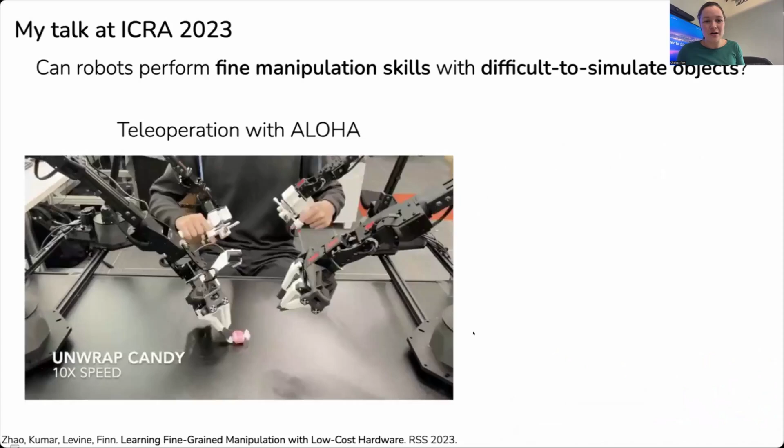I want to start off by going back to my talk at ICRA last year. I talked a lot about how robots can perform fine manipulation skills with difficult to simulate objects, including deformable objects. Specifically, I presented some of our work on the ALOHA teleoperation system.

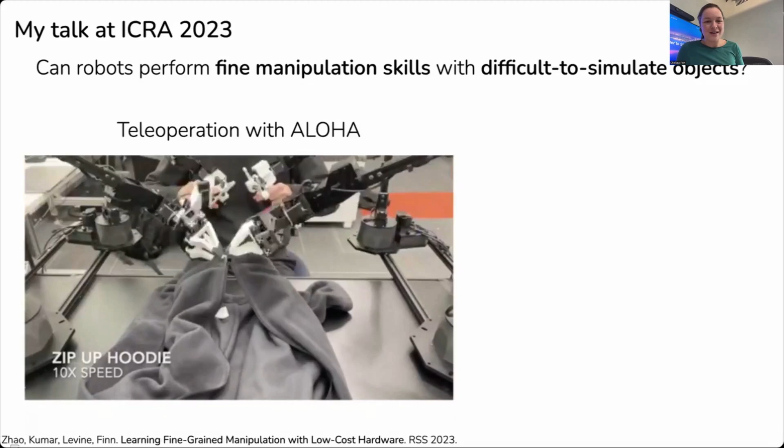A big part of this work was first on the hardware side, trying to develop a teleoperation system that allows you to perform a wide range of different tasks, including tasks like being able to stuff things into a plastic bag, zip up a hoodie, and so forth.

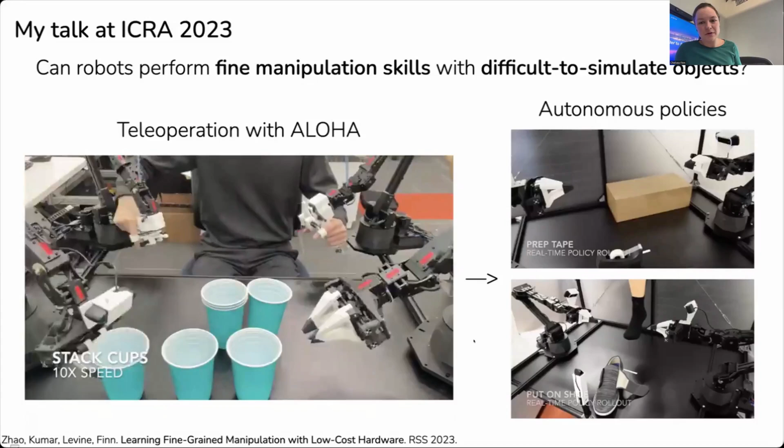With the system, we were able to train neural network policies to autonomously complete different tasks by providing 50 demonstrations of each task and training a neural network to control the robot to do that task.

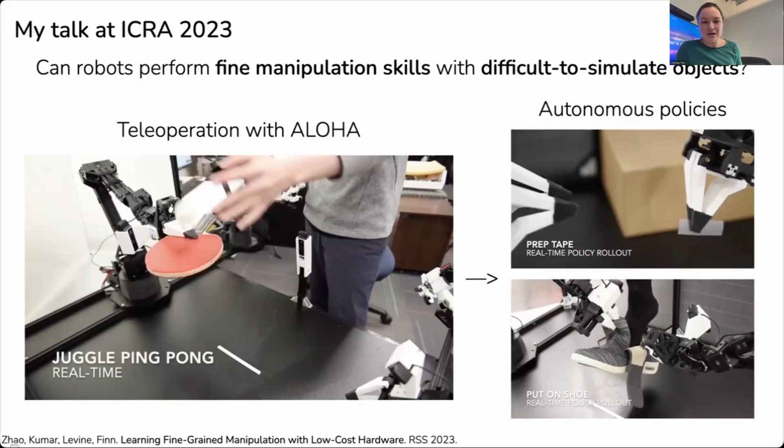On the top right was a task of tearing off a piece of tape and putting it on a box. And on the bottom right, we were learning a task of putting a shoe on a foot.

What I want to talk about today is building quite a bit on this question of, can we enable robots to perform fine manipulation skills with difficult to simulate objects? But I'd like to take it one step further and see whether we can learn fine mobile manipulation skills, and moreover, learn long horizon fine manipulation skills. In both cases, we'll be looking at really difficult to simulate objects.

So let's dive in and talk about fine mobile manipulation skills. When we started this work, we wanted to learn mobile manipulation skills, and we actually did a project.

Zipeng was working on a project with a LoCoBot. We were trying to learn mobile manipulation. He was really interested in the kind of whole body control. And this was a platform that we already had in the lab.

It turned out that when we actually went to collect data on this platform to try to learn manipulation tasks, it was extremely time consuming to try to control a robot. We started out with like a joystick or a handheld controller or a keyboard controller and so forth.

And we weren't able to figure out a good way to efficiently collect data on this platform. So Zipeng, after this, was really motivated to try to understand if we can efficiently collect mobile manipulation data that would allow us to learn from that data.

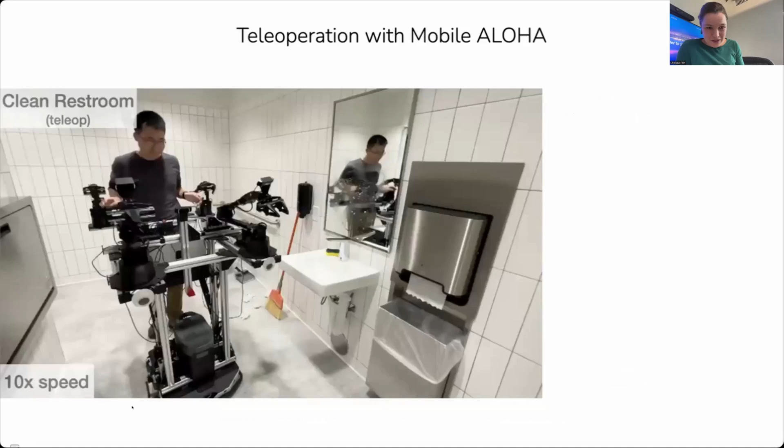Specifically inspired in part by the ALOHA work, he decided that he wanted to work on mobile bimanual manipulation. The resulting system that he developed, focusing on teleoperation, is this system right here. It's a mobile bimanual manipulation system.

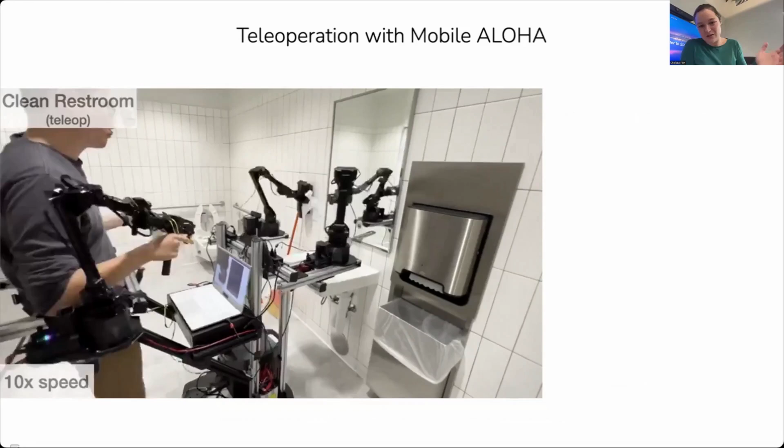You can see him teleoperating the robot to do a fairly wide range of tasks here, but basically all surrounding cleaning the bathroom. Unlike the previous system, he's able to do a wide range of tasks, and he's able to do so fairly efficiently. This is sped up so that we can show you a wide range of things that you can do with it.

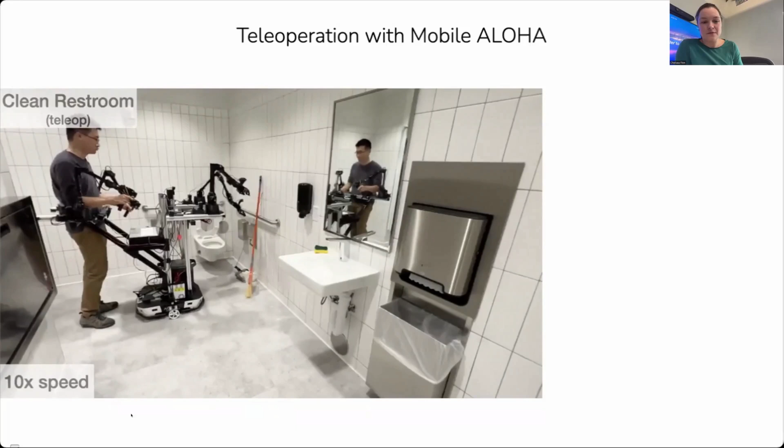But even in real time, the speed certainly isn't at human speed, but it's actually quite reasonable for teleoperation. Moreover, a few things are worth noting. First, you can do whole body teleoperation, so you can control both the base and the arms at the same time. And the arms are done with puppeteering, similar to the ALOHA system.

The mobile base is teleoperated by simply pushing the base, and you use the encoders to record how it's moved and then command it to move accordingly. All of it is done in a $32,000 budget, which is generally trying to push the boundaries on low-cost robots, and we've seen those boundaries pushed even more so. I think we can probably make this system even cheaper with more recent hardware being developed now. The other thing is it's all onboard power and compute, which means you can take it to lots of different places and don't have to be bottlenecked by a workstation or power supply.

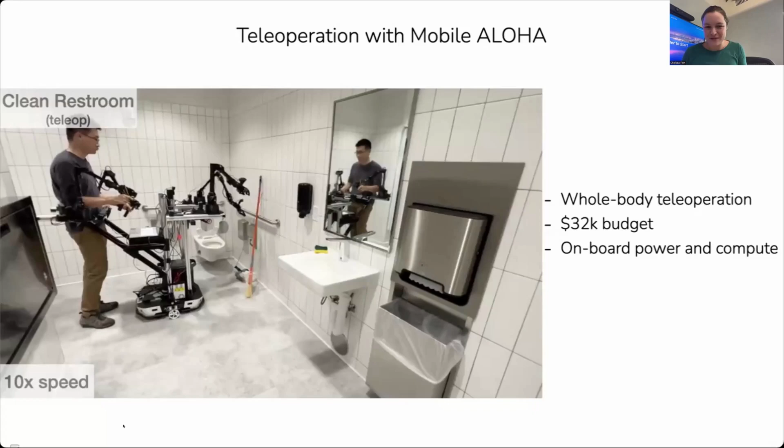So this was a teleoperation system that Zipeng was working on. The motivation ultimately was, of course, to actually allow the robot to autonomously perform tasks. And to do that, he followed a very similar method as what we did in the Aloha work.

We're training a transformer. This architecture has both an encoder and a decoder. The encoder takes as input embeddings from each of the images. In the original Aloha work, we were using 4 cameras; in mobile Aloha, we just had 3 — one for each of the wrists and one third-person camera. These then map both to joint angles as well as to the motion of the base.

One thing we found to be really important in some of our prior works, and also here, is to predict a chunk of actions at a time and execute that chunk open loop until the start of the next chunk.

The big thing we did differently in this mobile manipulation work was co-training on static manipulation data. We found that by co-training on both static and mobile manipulation data, it acted as a form of regularizer and allowed us to learn mobile manipulation tasks with on the order of 50 demonstrations, which in the grand scheme of things is actually quite small.

So this is the gist of what we did. Concretely, with the teleoperation system, you collect 50 demonstrations showing the robot how to do the task repeatedly under different initial conditions. Then we train this transformer model on those 50 mobile manipulation demonstrations alongside previously collected static Aloha data, around 800 demonstrations. We then evaluated how well the policy could perform fairly challenging mobile manipulation tasks.

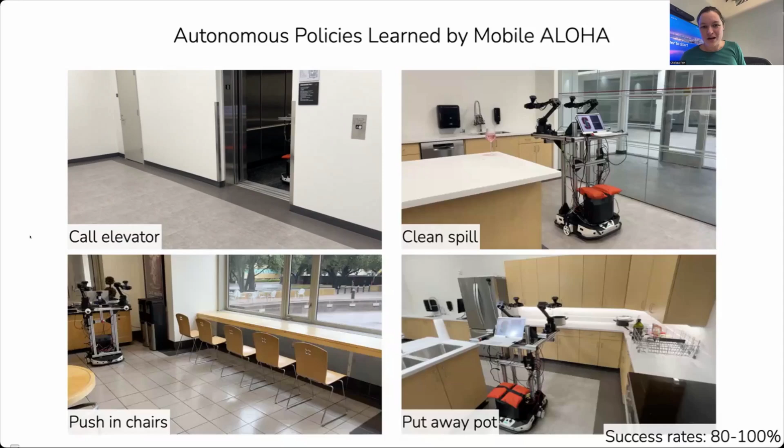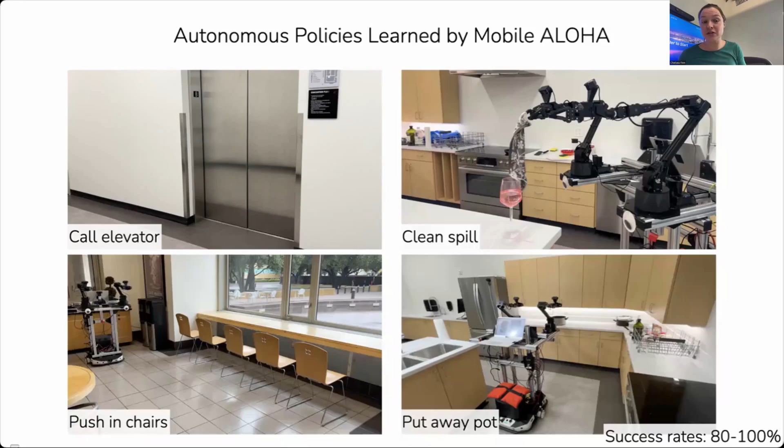We also looked at a task of cleaning up a spill on the table, which involved driving up to pick a towel on the faucet, then driving over to a spill, picking up the wine glass and pouring it. Given this is a workshop on deformable objects, I should mention that in many ways what we're doing here isn't anything special for handling deformable objects. It's the same method, and it doesn't really care if the objects in the environment are deformable or rigid. That's one of the really nice things about an end-to-end learning approach — you essentially just need to provide sufficient data to train it, and the rest can follow.

A third task we looked at was pushing in a sequence of chairs. In this case, we actually only trained on data pushing in the first 3 chairs, but because it's a fairly repetitive task and all the camera images are from an egocentric perspective from the robot, we found the policy was actually able to extrapolate to the 4th and 5th chair. These videos are not sped up, so you may need a little patience to get all the way there.

In the meantime, a 4th task we looked at was being able to put away a pot. For this task, you actually have to very closely coordinate both arms and move the base at the same time. This really emphasizes the importance of being able to do a task that involves whole body control, rather than alternating between operating the arms and operating the base of the robot.

In the meantime, we can see that in the bottom left, the robot is successfully pushing in the fourth and fifth chair. The success rate of these policies is actually quite reliable, but isn't 100%. They're around 80 to 100% success rate in the environments they were trained on.

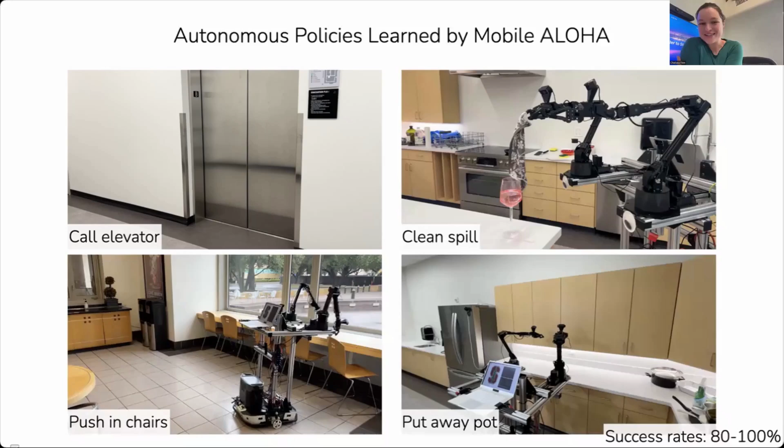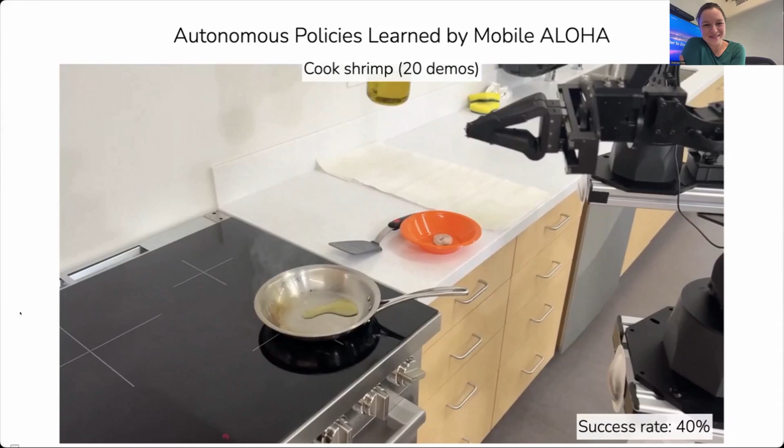We also looked at one more, even more challenging task. For this one, we only collected 20 demonstrations, simply because it was somewhat time consuming to collect demonstrations. Also, the shrimp had various fragrances that were not so pleasant to collect data with. But nonetheless, despite this, we were able to get a policy that succeeded at the full task of cooking one piece of shrimp around 40% of the time, and I expect that if we collect more data, it would be even more successful.

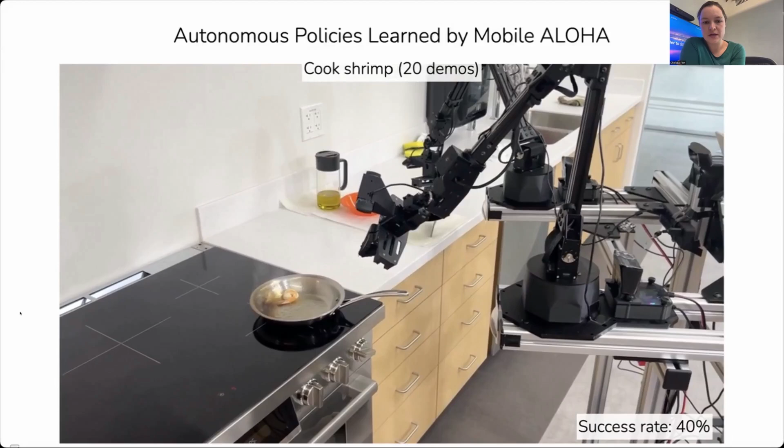The full task involves pouring olive oil on the pan, then putting the shrimp into the pan, using the spatula to flip the shrimp on the pan, putting down the spatula, and then eventually serving the shrimp into a bowl on the other side of the kitchen.

This last part ends up being a little bit less precise. We'll see — I think it might spill some oil on the counter there, so definitely some room for improvement. But I found this rather exciting, because this was the first time I'd ever seen a robot, at least in our lab, do something that resembles a real cooking task.

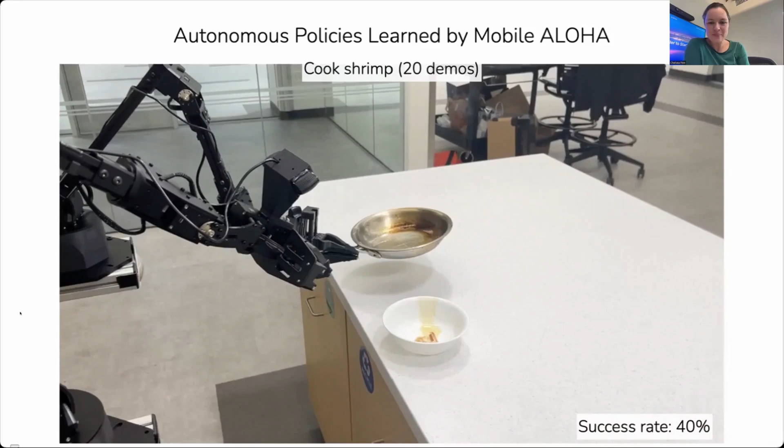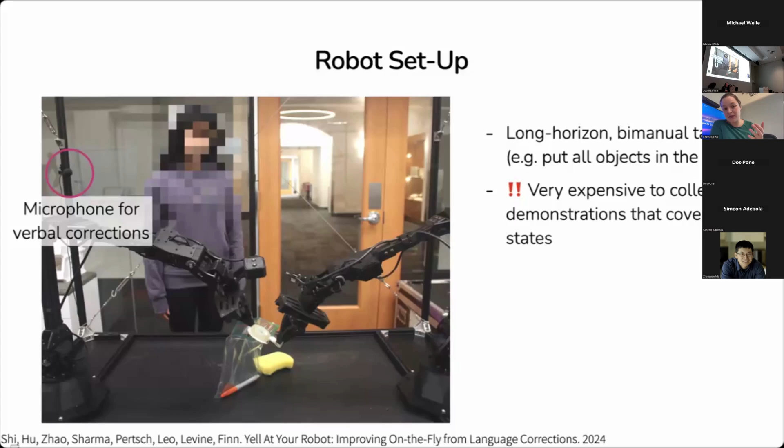So this is going to motivate giving supervision, not just at the level of full long horizon demonstrations, but supervision that helps it figure out how to correct for mistakes when it inevitably makes them. The problem setup we're going to look at is incorporating language to help with this long horizon nature.

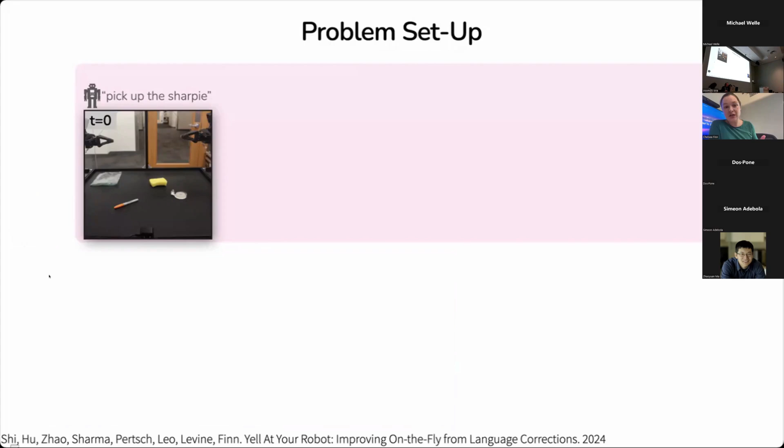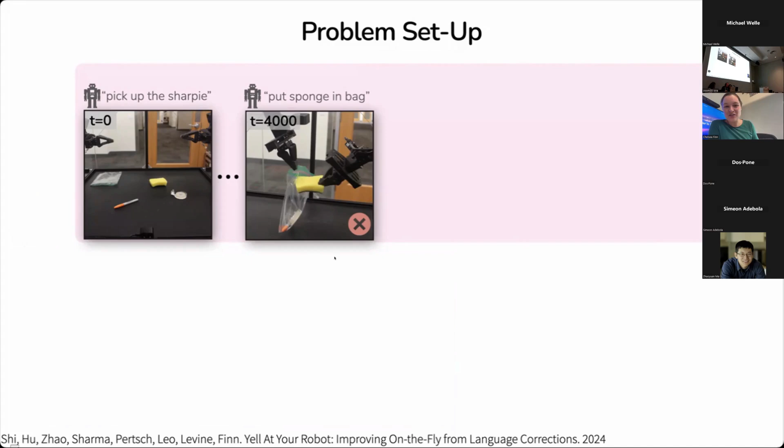In each sub-task of the full long horizon task, the robot might be following an instruction, like picking up a Sharpie, putting a sponge in the bag. Maybe it struggles to put the sponge in the bag in this case, and so we'd like to interrupt it and give it feedback on how to do this scenario better, like maybe to use the sponge to open the bag wider because the bag isn't very open right now, and then eventually complete the task. So this is the setup we'll consider where we want to give corrections on the fly to help it perform the long horizon task.

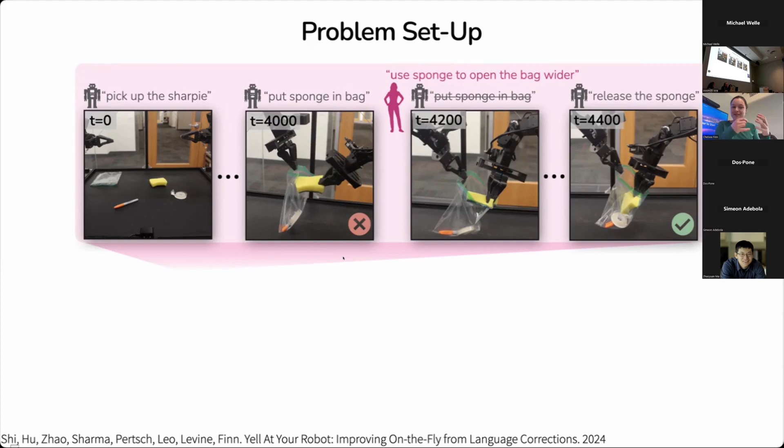Furthermore, we'd like to take this language correction data and use it to improve the policy by fine-tuning it with this language supervision, to improve our policy and eventually improve the overall performance of the robot. Essentially, we want to leverage this language supervision both on the fly and for future improvement for this challenging long horizon task.

Now, when we only have language corrections to learn from, it's a little more challenging to improve from it because it's not something we can directly train a robot policy with. So we first wanted to connect the robot behavior with language. To do this, we're going to train a hierarchical policy with language as the interface between a high-level policy and a low-level policy. This is something that's been done in many prior works, so it's not new in the work we're doing.

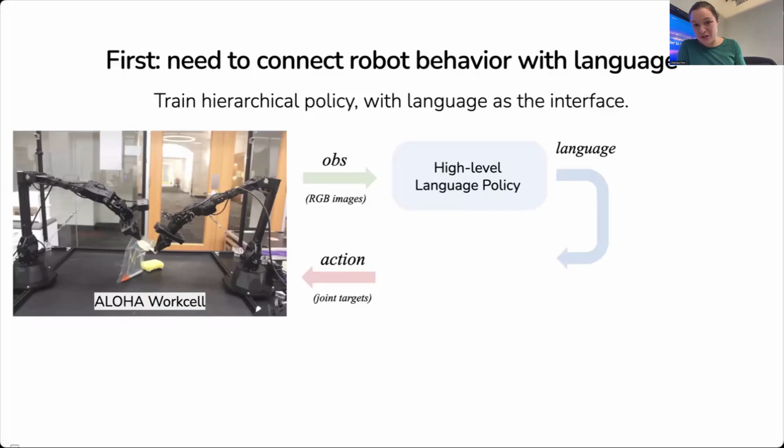We'll get an observation from RGB images taken from the robot's cameras. This will be passed into a high-level policy that outputs a language command. In this case, the language command might be something like 'put the tape into the bag', or maybe 'rotate the tape clockwise'. Then we'll have a separate policy that takes this language as input and outputs actions for performing the task, such as how it should move the joint angles of the robot.

Now, with this hierarchical setup, which appears in many prior works, our key insight is that if the low-level policy can follow a wide range of instructions, then you can improve the overall system just by updating the high-level policy. Specifically, if we only need to update the high-level policy, we can do so only with language supervision, because the output of this policy is in the language space.

More specifically, what we're going to do is essentially just do DAgger on this high-level policy and freeze the low-level policy. So as the robot's executing, we will correct it in language, and then we can use those language corrections to change what we want the high-level language policy to be doing.

Specifically, we'll freeze the low-level policy, run the robot multiple times, then intervene if we see the robot doing something wrong and give it a language correction for what it should be doing instead. This language correction overrides the high-level policy prediction. Additionally, we're going to fine-tune the high-level policy on these language corrections to encourage it to provide that language correction instead of its original prediction.

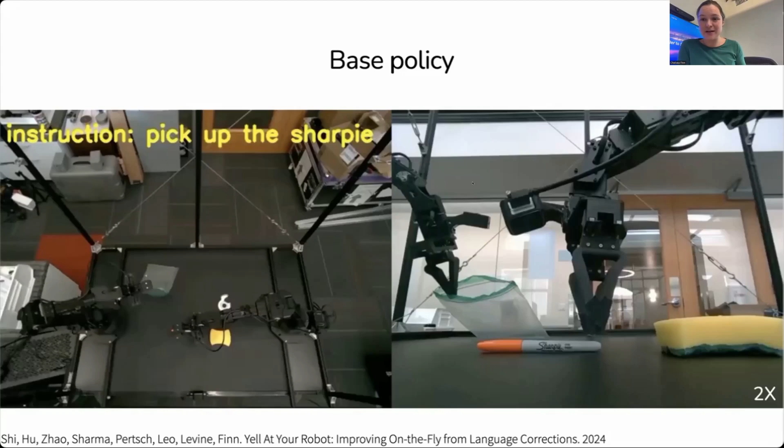On the left you can see the language instructions that the high-level policy is outputting. Before we do any fine-tuning, the robot will make a mistake, like not being able to put the Sharpie correctly into the bag. It releases the Sharpie and is not able to recover from that kind of mistake.

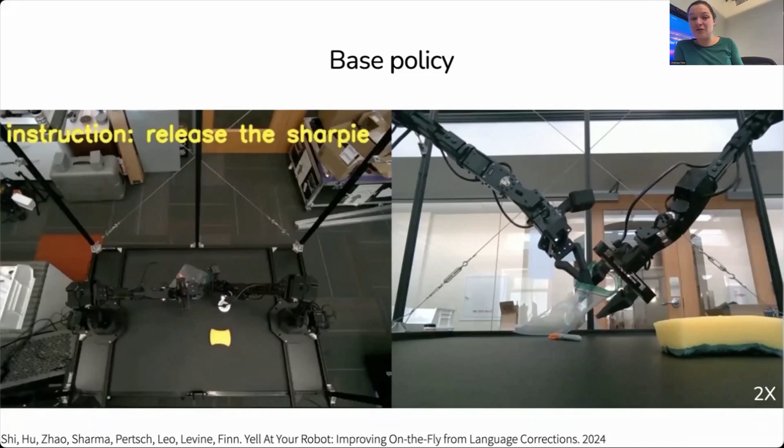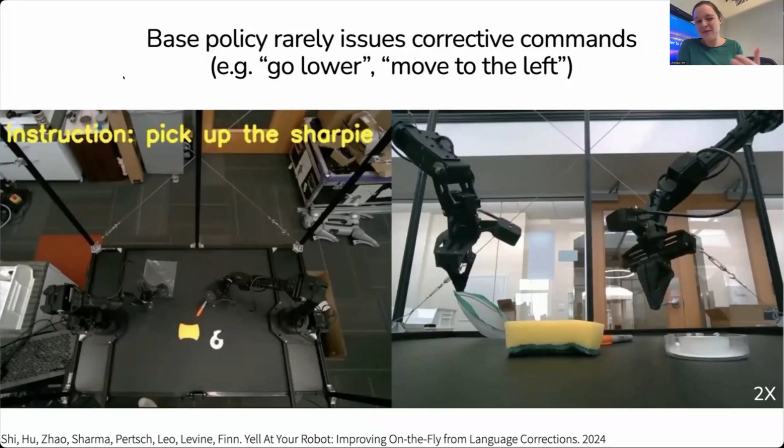We find that before fine-tuning, it very rarely issues corrective commands. Here it's struggling to pick up the Sharpie and just repeatedly fails to pick it up, and the high-level policy doesn't actually help the robot do that.

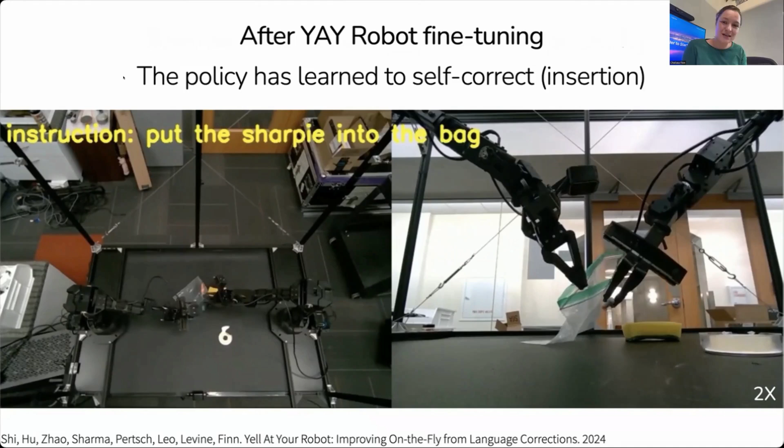After fine-tuning on language corrections, we find that it's able to self-correct. Here it inserts the Sharpie incorrectly, then the high-level policy says move to the right, then put the Sharpie in the bag. It makes a mistake again, then it says move towards me, go higher, and then put it into the bag, and is eventually able to get the object into the bag successfully.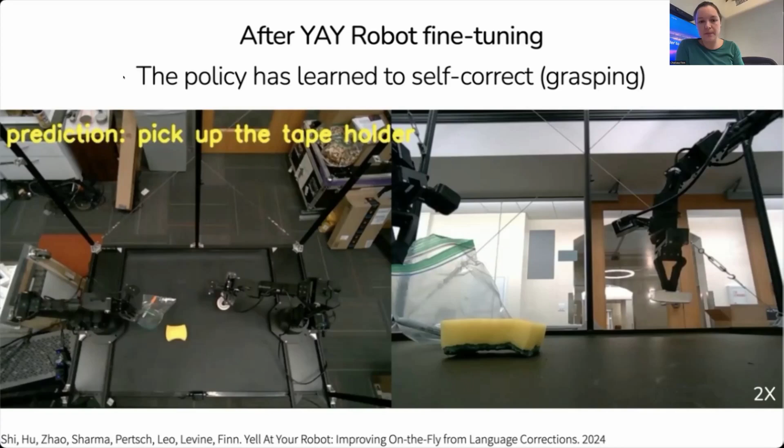It's also able to figure out how to change strategies. Originally it tries to put the sponge into the bag and shove it in, which isn't successful. So the high-level policy then instructs it to release the bag and push it into the bag instead, a different strategy, and it's eventually able to get it a little bit more into the bag.

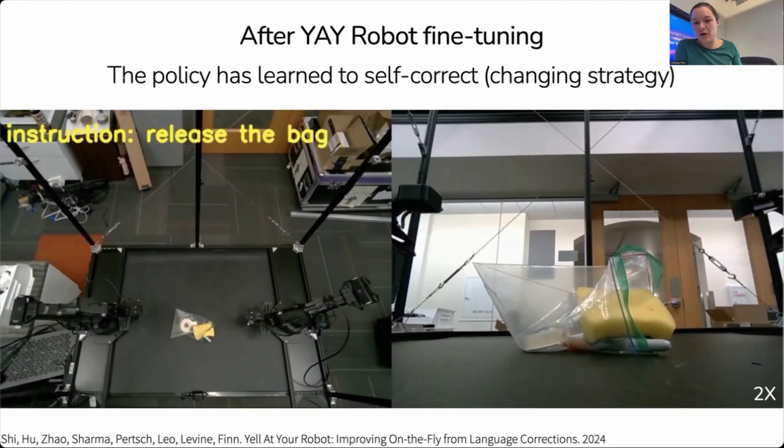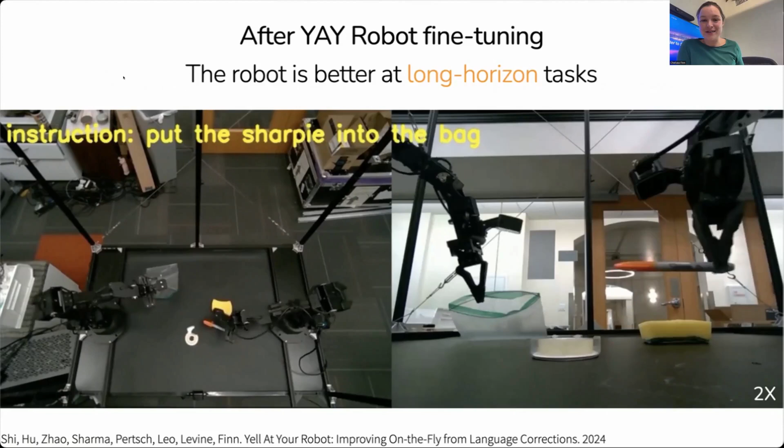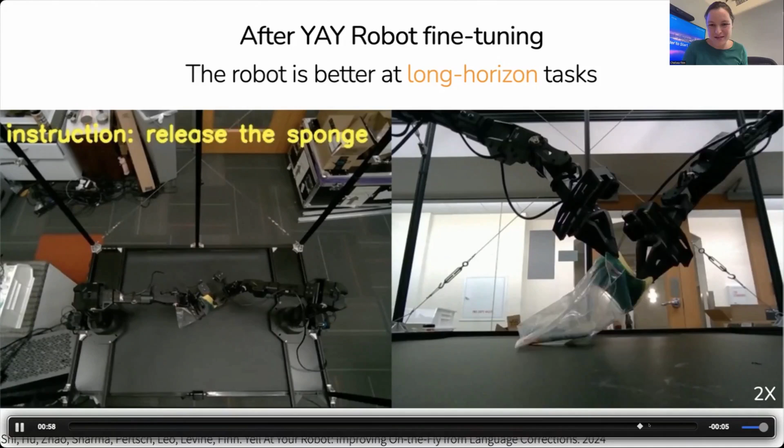As a result of this fine-tuning process, we saw these kinds of self-corrections. We also see that the robot is better at performing the full long horizon task of putting all the items into the bag. This video is rather long because it's a long task, but we see it successfully puts the Sharpie into the bag, then the tape, and eventually also gets the sponge most of the way into the bag. This is all fully autonomous.

That was after fine-tuning with the language commands compared to the base policy. We also found that we're able to give language corrections on the fly.

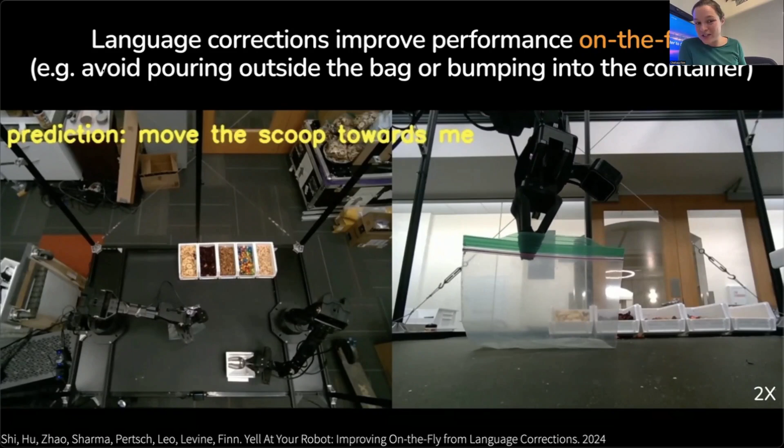One of the things that's really cool here is a different task where we're trying to make trail mix with the robot. We find that if it looks like the robot's about to make a mistake, you can actually preempt it with language corrections on the fly to prevent that mistake.

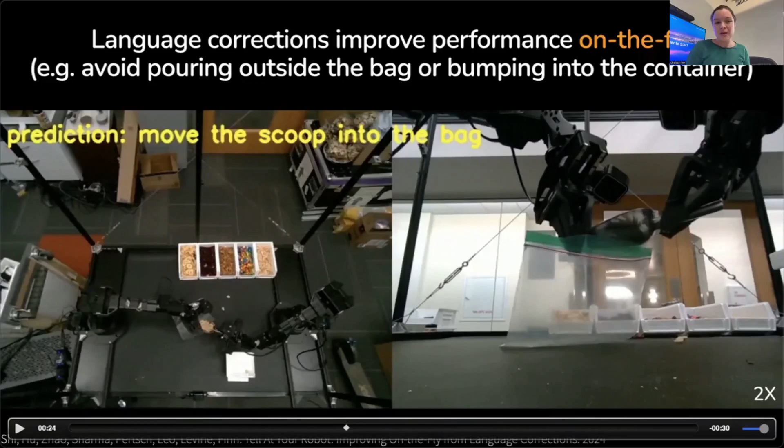It's a little subtle, but here we see it's trying to move the scoop into the bag, and the scoop is actually a little too high. So the user overrides this prediction, saying move the left arm to the left to move the bag to the left, go higher, then move the scoop into the bag. This preempts it from dumping all of the peanuts onto the table, so it's able to more successfully put the peanuts into the bag.

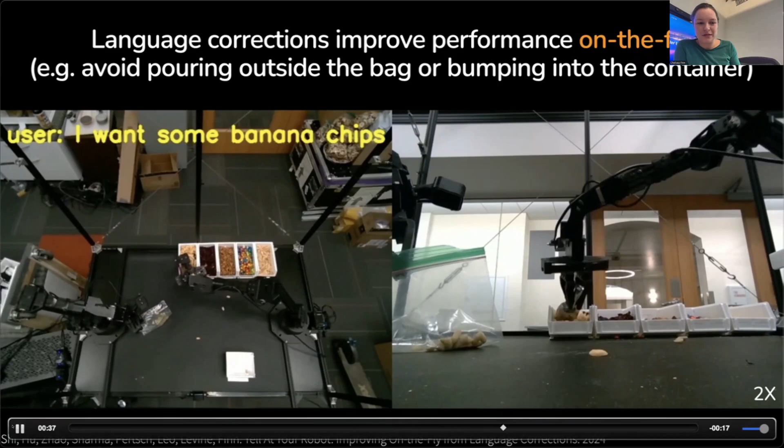After fine-tuning, we find that for pouring it's also able to preemptively self-correct when it's about to make a mistake, going higher and moving the scoop into the bag, fully autonomously.

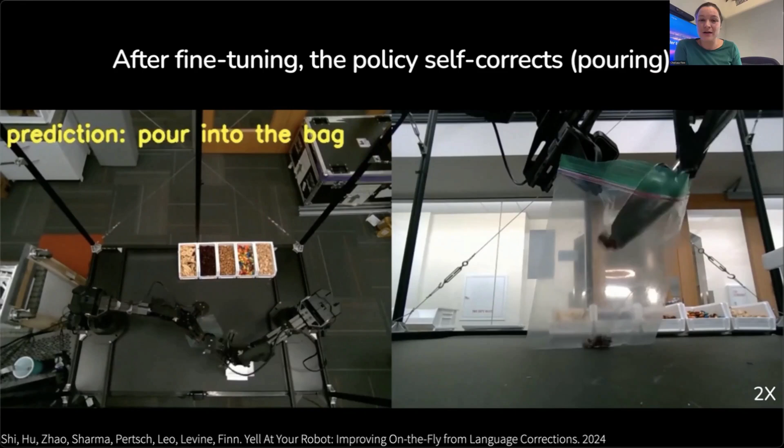Those were all qualitative results. We also measured performance quantitatively, and on three different tasks we found that just with language corrections during this fine-tuning post-training phase, we saw a 20% boost in performance over the base policy, closing a lot of the gap to using human verbal corrections as an oracle.

We also see that there's still a lot of gap between using a human high-level policy and 100% performance. This suggests our low-level policies probably have a lot of room for improvement, and by improving those we'd be able to close the gap further toward full success.

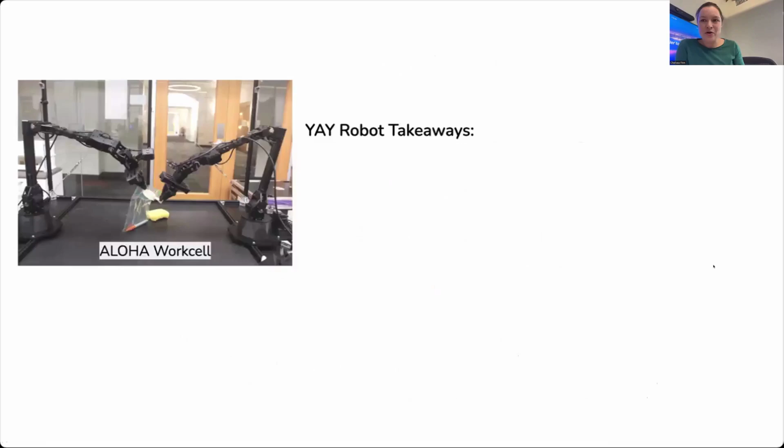The takeaway here is that you can now productively yell at your robot with this method, and the robot can improve from only language feedback without demonstrations by fine-tuning this high-level instruction policy. One limitation is that this relies on a very performant instruction-following policy.